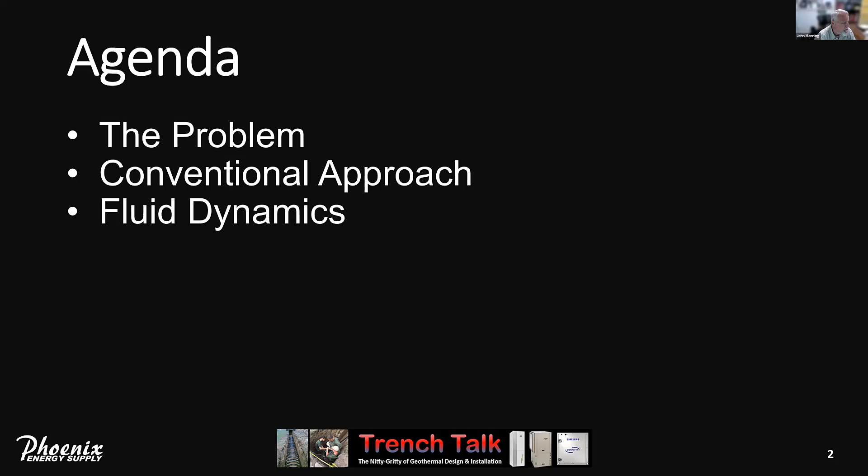So without further ado, that's today's agenda. One, we'll describe the problem, or the opportunity as you might prefer to call it. What would be the conventional approach to solve that problem? A little bit about fluid dynamics and understanding the system behavior, talk about energy, the GX features, our exclusive design support in designing such systems. And of course, I want to hear from you—either questions or comments are much appreciated.

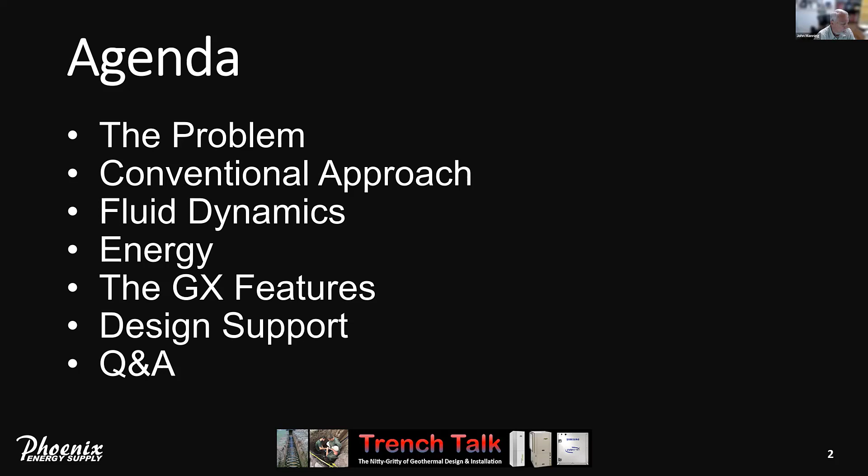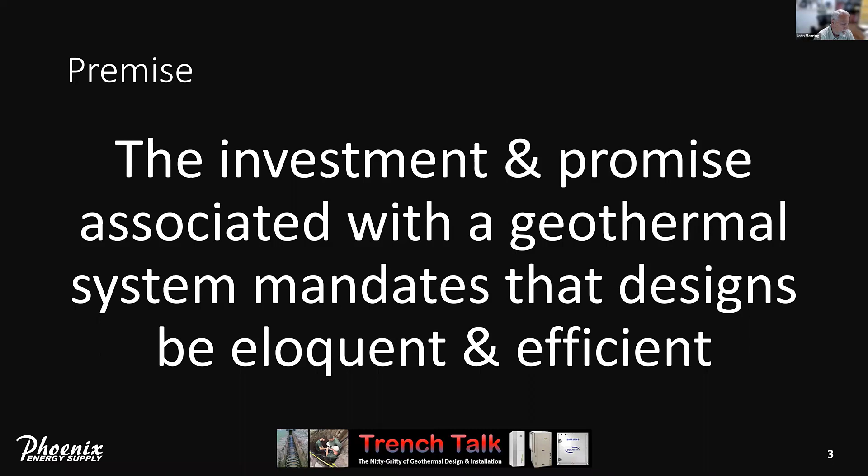So the premise that the GX Flow Center was built upon was that the investment and promise associated with a geothermal system mandates that designs be elegant and efficient. People are spending tens of thousands, hundreds of thousands of dollars to get a geothermal system—it's not just to make them warm or cold, it is to do so with the highest efficiency. That word is synonymous with geothermal. So the problem is, whenever you have a system of say 3 or more heat pumps, how do you go about developing a pumping strategy that really reflects the type of efficiency and elegance that we want to see in a geothermal system.

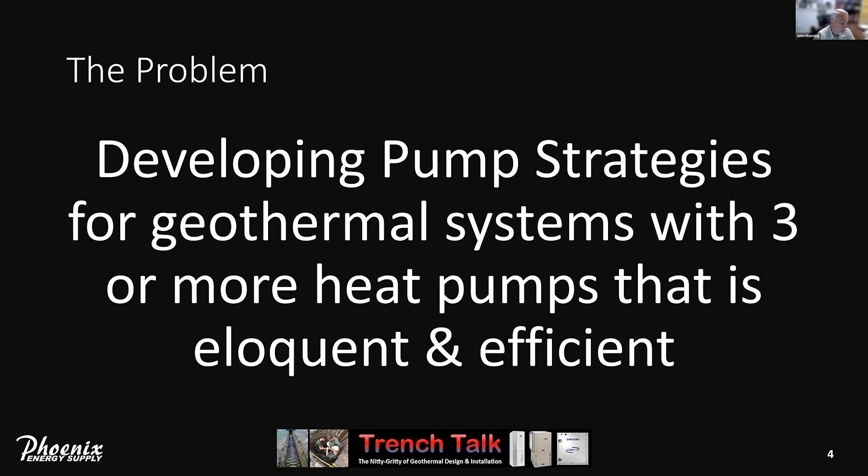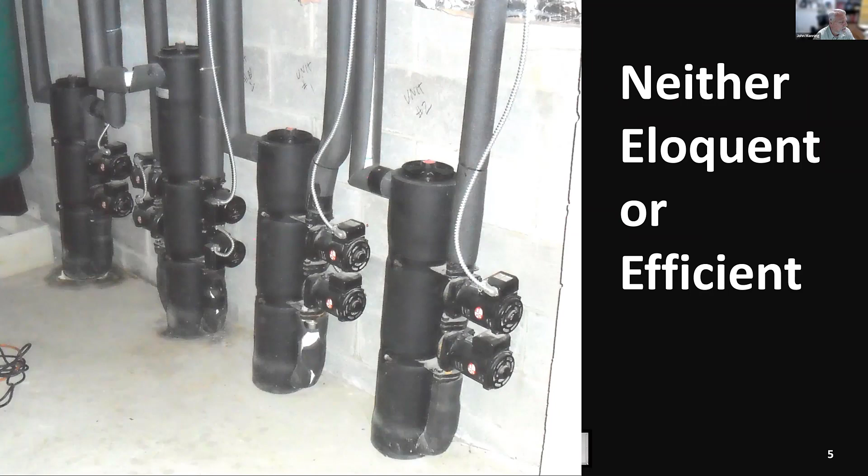So here's a picture of a job I visited down in New Jersey. Now, I sold those flow centers, so I was real happy when I got the order, but it is neither elegant nor efficient. The total of 7 heat pumps being served—you can't even see all the flow centers on this job. This one right here is actually a 2-circuit flow center, but each one of them feeds a single heat pump. The dual circuit feeds 2. And there are more flow centers out of the field of view of the camera. So a total of 7 heat pumps, each having 2 pumps to serve it.

These being non-pressurized flow centers requires that each one have its own dedicated loop field. You cannot put more than 1 non-pressurized flow center on a single loop field. In other words, you can't have multiple non-pressurized flow centers on a system. And when you do that, you lose the benefit of having a consolidated single loop. There's nothing better than 1 out of 7 heat pumps operating on a much larger loop field under those part load conditions.

Although multiple pressurized pump packs can be piped in parallel and used on a consolidated loop field, the energy implications are the same.

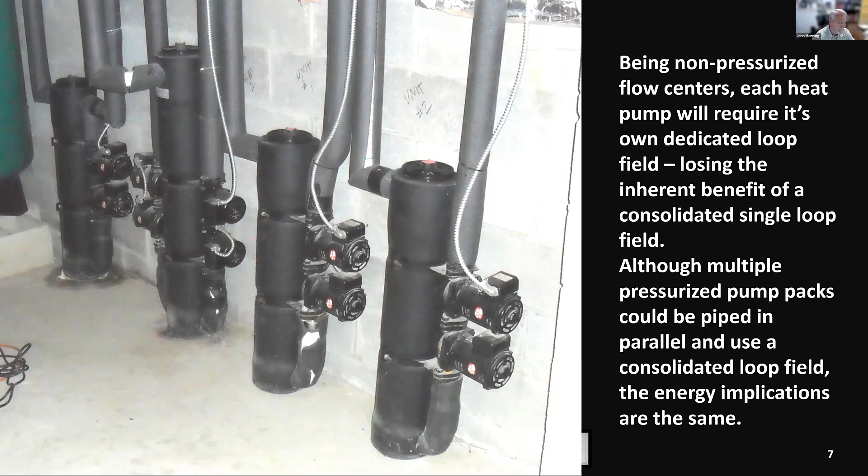So let's do some math. We've got 7 heat pumps, we've got 2 circulators on each heat pump, each circulator is going to draw about 200 watts. If each heat pump operates roughly 2,500 hours a year, you've got the 200 watts times 2 pumps times 7 heat pumps times 2,500 hours. That's 7,000 kilowatt hours, or at 15 cents a kilowatt hour, results in over $1,000 a year to operate those 14 circulators.

So if Charlie would be so kind to pop up a poll about pump energy—how much pump energy do you think we can save if we had a more elegant solution? I see the results, it's pretty evenly split from 40 to 80%. Give you a minute or two to get some more responses. I appreciate you taking the time to answer our quick poll.

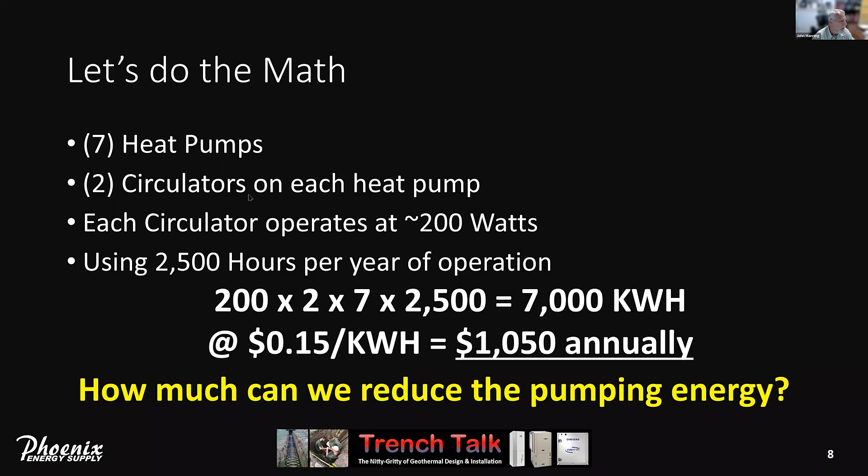Let's go to the next screen. Fluid dynamics—understanding this is the key to really understanding the energy associated with pumping.

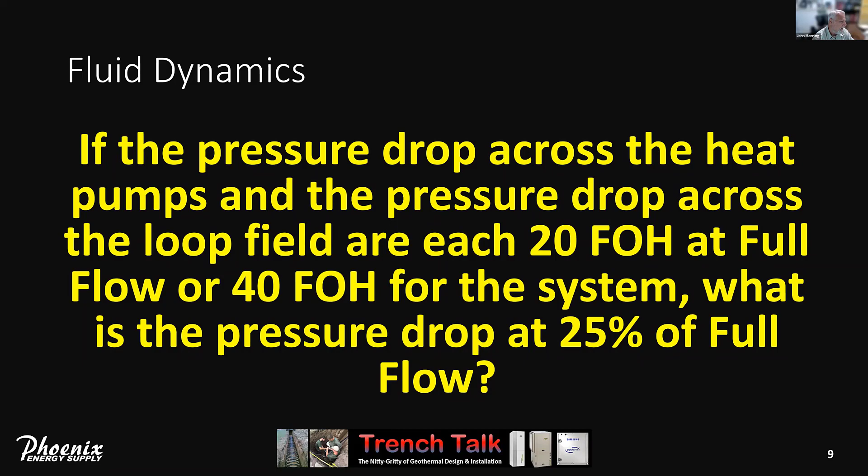So the question is, and this is another poll I want you to just react to: if the pressure drop across the heat pumps and the pressure drop across the loop field are each 20 feet of head at full flow, or 40 feet of head for the total system pressure drop, what is the pressure drop at 25% of full flow? For example, if we had 40 gallons a minute and the total pressure drop was 40 feet of head, and then we were to pump only 10 gallons a minute through that same system, what would the pressure drop be? Got one response so far. I'm going to let you guys ponder this because it provides insight into the dynamics in a system. You really got to be comfortable with this understanding, not necessarily to do the math, but to have a gut feel about what's happening in a system.

You've got two parts to the system: you've got the loop field and you've got the heat pumps. Combining the loop field pressure drop with the heat pump pressure drop results in the system pressure drop. And as I said, the total system under full flow is 40 feet of head.

In the loop field, we don't care what the flow rate is. The pressure drop follows a typical parabolic curve. So if we cut the flow rate in the loop field in half, the loop field pressure drop will go down by a factor of 4 — that's 1/2 squared, or 1/4. So at 20 GPM, the loop field pressure drop will drop all the way down to 5 feet of head.

At 25% of full flow, we square 1/4, or 0.25, and that results in a very low pressure drop — basically 1.25 feet of head across the loop field when we cut its flow rate down by a factor of 4. So from 40 GPM down to 10 GPM, the pressure drop drops considerably, whatever the math works out to be.

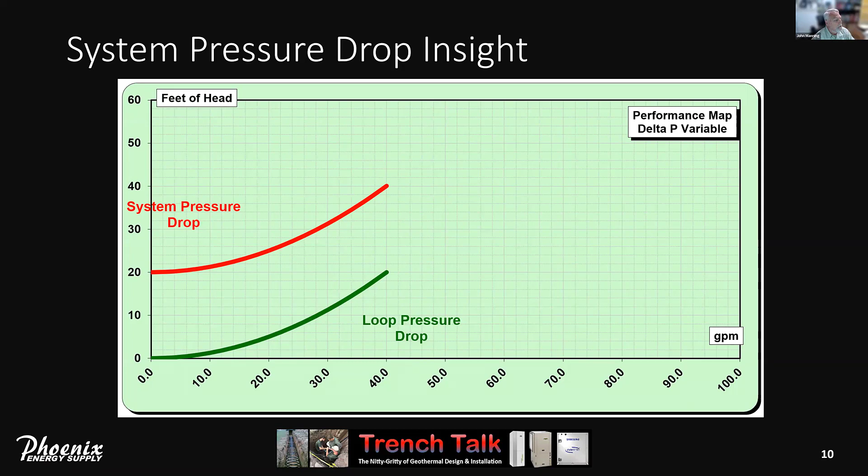So to me, this is a vital understanding for picking the right pumping strategy. Now, wouldn't it be wonderful if we had a pump that was smart enough to know this and adapt accordingly — that when the system's operating at half flow, it doesn't have to create as much head, and if it's operating at very low flow, it doesn't have to create even that much head. So it's a smart pump.

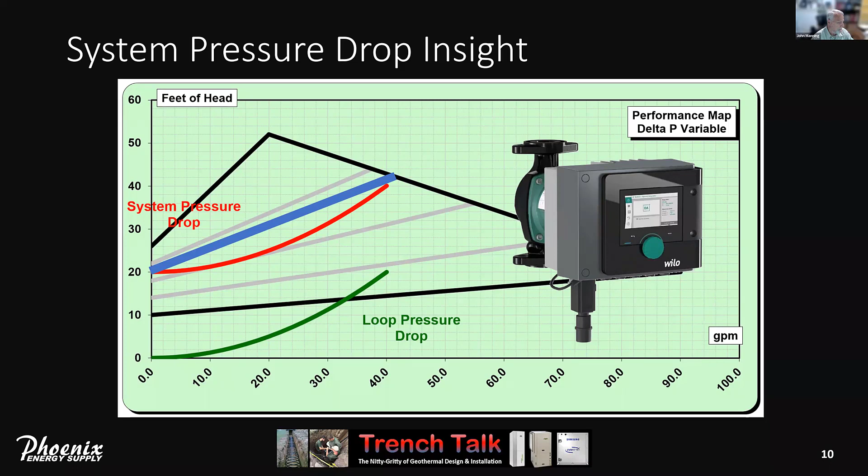And those energy implications — here's the actual WILO curve, and these angled lines illustrate the variable delta P curves I just talked about. In some applications you may have to set it up to be a constant delta P, but for right now, ideally you want variable delta P. And here's that control line we'd like to use in this application.

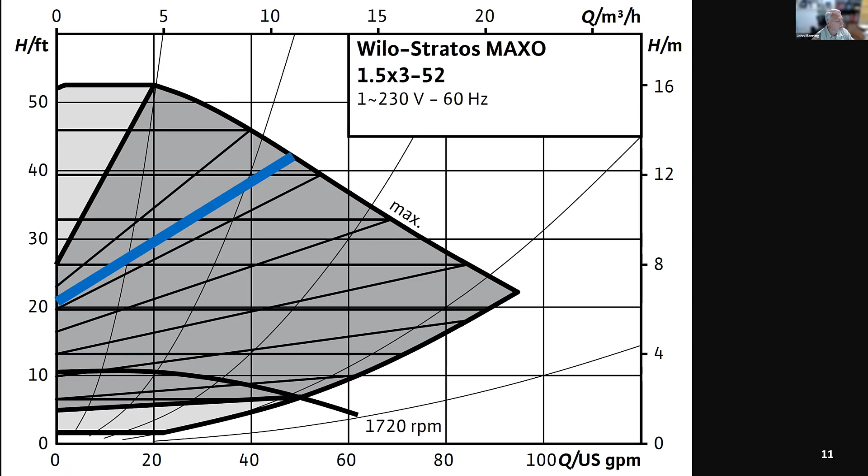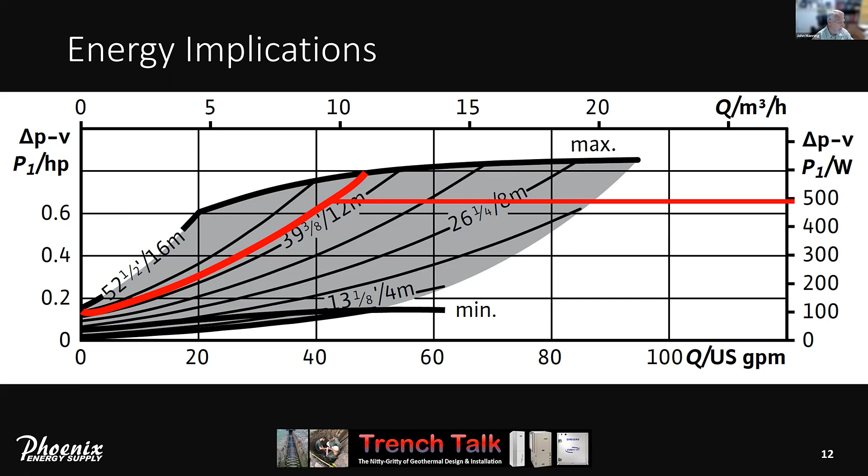At 42 GPM, we can see where those lines cross and go over to the right, illustrating roughly 490 watts. So at full flow, we're looking at 42 GPM, 40 feet of head, for 490 watts. We cut our flow down to roughly 1/4, and now we're looking at roughly 150 watts for 10 GPM, and roughly 21.125 feet of head.

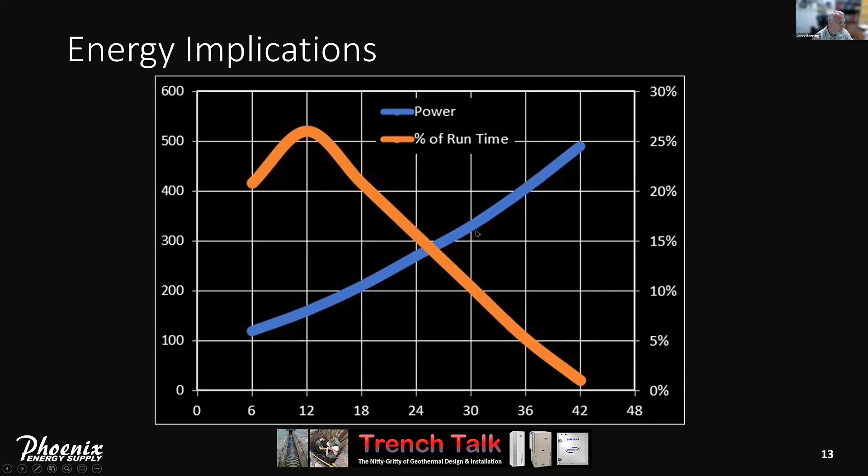Almost every application will have a curve similar to this. Very seldom will every heat pump be running simultaneously. The bulk of the time, you're going to have 1 to 3 or 4 out of 7 operating simultaneously. Understanding this distribution of runtime combined with the power curve, we can put all this data into a table.

We can look at 6 GPM, it's 120 watts. At 24 GPM, 270 watts. We take the percent of runtime, and this is based on 5,000 hours a year of operation for the flow center, which is a lot more than a single heat pump. Each heat pump will operate roughly 2,000 to 2,500 hours a year, but due to their overlap and simultaneous operation, the flow center would have to operate typically about 5,000 hours a year.

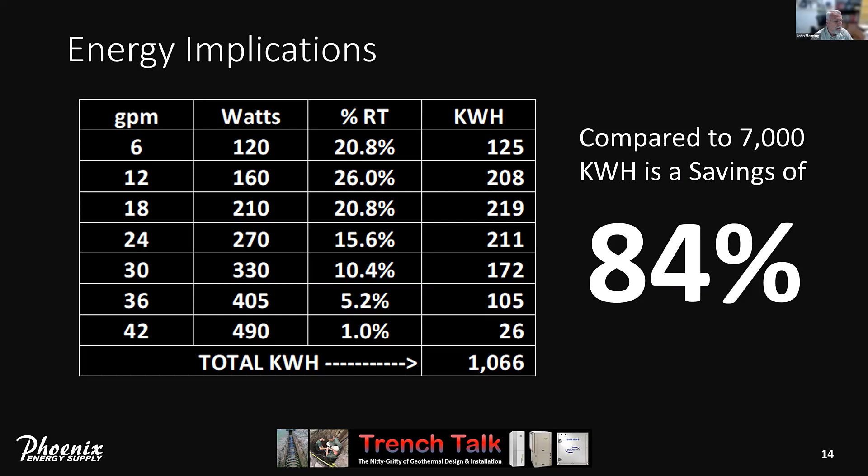We do the math, we accumulate those kilowatt hours, and in this case, our energy for this system is a little over 1,000 kilowatt hours a year, compared to 7,000 kilowatt hours. That's a savings of 84%. So it's significant, dramatic, cutting operating costs from $1,000 a year down to $150 a year or thereabouts.

So let me introduce you to the GX Flow Center. We've got 5 configurations. The basic is just a single pump and one big circuit through the heat pump, through the loop field and back.

Then we have the dual. We have 2 pumps in parallel. You can size them to give you full redundancy or partial redundancy, whatever you choose. I'm a big fan of partial redundancy. That allows you to keep the size of the pumps perhaps one size smaller and save some money. So it's a judgment call whether your client wants 100% redundancy where the system can operate on one pump only and meet full flow requirements, or partial redundancy where a single pump might be able to handle 60 to 70% of full flow on one pump.

Then we also have primary, secondary. We have 2 pumps in 2 separate circuits. The primary, which is the loop field, would have 1 pump. The secondary, which are the heat pumps, has 1 pump. You may have to use primary secondary when the pressure drops of either side, or the total pressure drop of both, exceeds the capability of our pumps. So if you break it up into primary secondary, you have a dedicated pump for each half of the system, which you may need to do. I don't think it's preferable over a basic or a dual, but quite often you get stuck needing that kind of pumping approach.

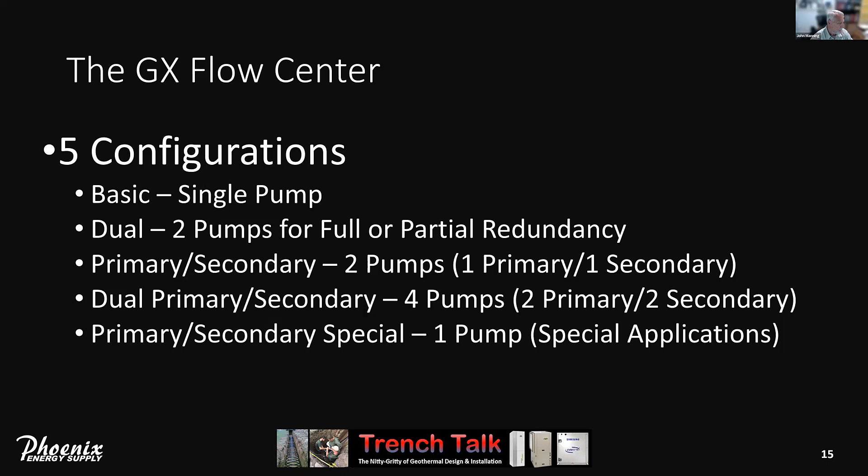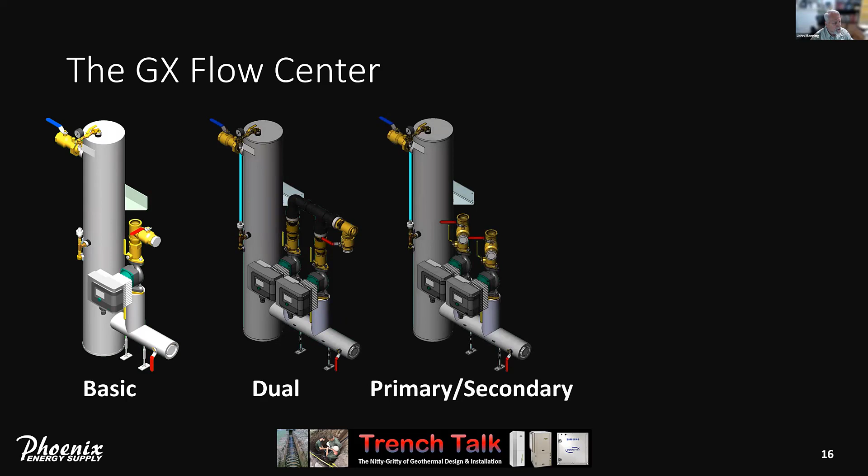So what do they look like? Here's the basic, the dual, the primary secondary, and the dual primary secondary, which we fondly refer to as the Spaceship.

It is quite an interesting looking product. Actually, some of our earlier models of the Spaceship, one of them is installed down in Tennessee at Al Gore's house. And Anna and I had the luxury of going down there and doing a service call on our flow center.

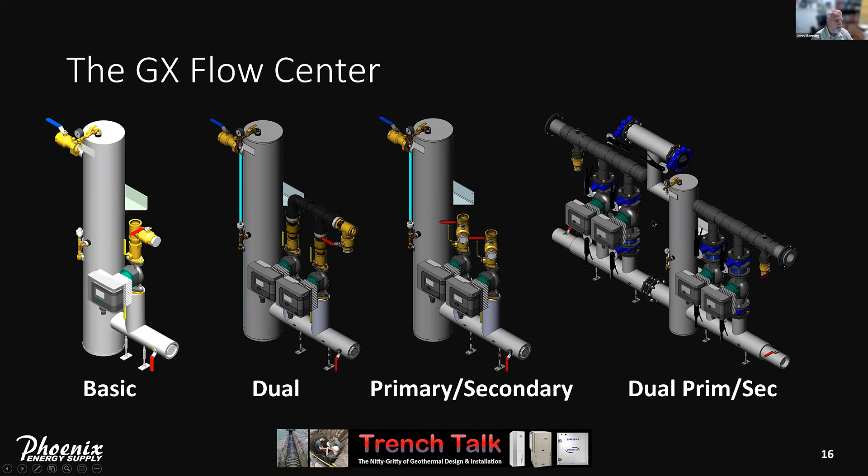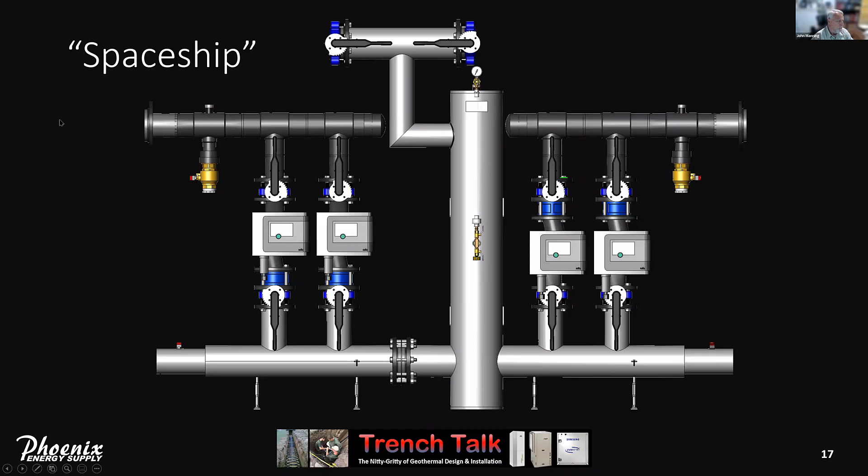So the Spaceship, I want to talk a minute about this design. Dual pump, primary, secondary. We're going to come in from our loop field on the left. These 2 pumps will pump down into a lower manifold, which will go through our canister. It's open to the canister, but directly opposite it is what's feeding our secondary pumps. So our secondary pumps pump up and out this manifold to feed the heat pumps in the system.

We come back from the heat pumps and connect to this butterfly valve, which has a straight through leg that goes out to the loop field. But there's a branch circuit off that T that goes right back into our canister, allowing the canister to be a hydraulic separator so we can operate the primary and the secondary at 2 different flow rates. The secondary side will be dictated by how many heat pumps actually have their 2-way valves open and what kind of flow rate is being dictated by the heat pumps.

And these WILO pumps will adapt. You'll configure these in a constant delta P mode because you always want X amount of head available to assure proper flow through each heat pump, no matter how many are operating. So you configure these in a constant delta P, and its flow rate will be dictated by the heat pumps.

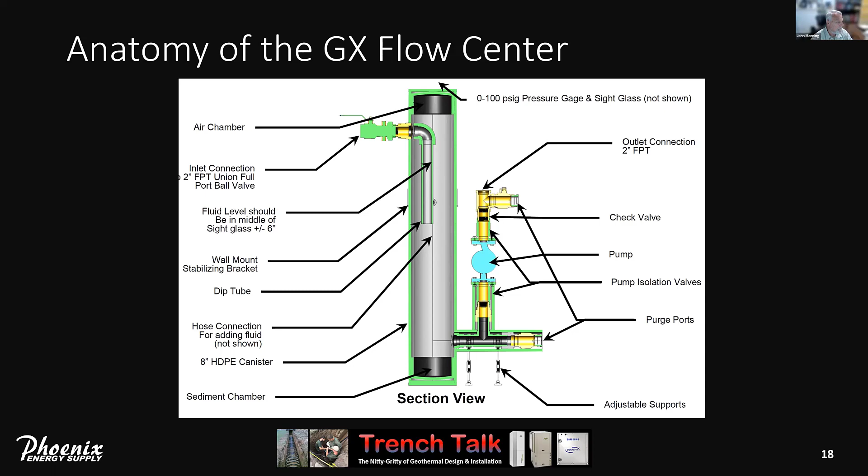For those who like the magic decoder ring to understand our part numbering system, this illustrates that.

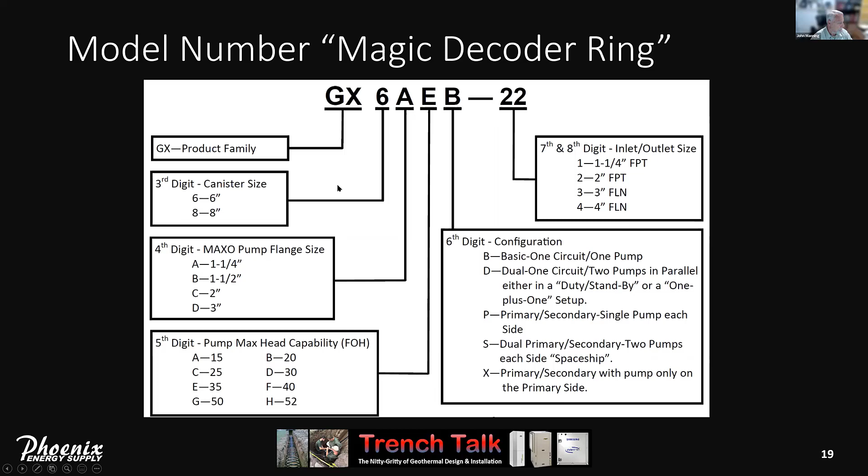Design support: we've put a lot of effort over the years to develop the ability to make selections to meet your needs. Here's an example of a particular project, but I want to walk you through the type of data we put into this, so when you have a project we can help you with, this is the type of data we need.

We'll start with the system characteristics. We like to put in the nominal tonnage and the desired flow rate per ton, which gives us an idea of the flow rate we're looking for.

What type of antifreeze, what level of freeze protection, how many heat pumps, how many distribution manifolds. We can come out of our flow center and go into up to 5 different distribution manifolds, and we have to model each one of those.

We want to designate the configuration of the flow center, and what type of piping you're using indoors. I'm obviously a big fan of polyethylene, but you could use PVC or copper or other material. Each one has its own unique pressure drop characteristics, so we like to capture that.

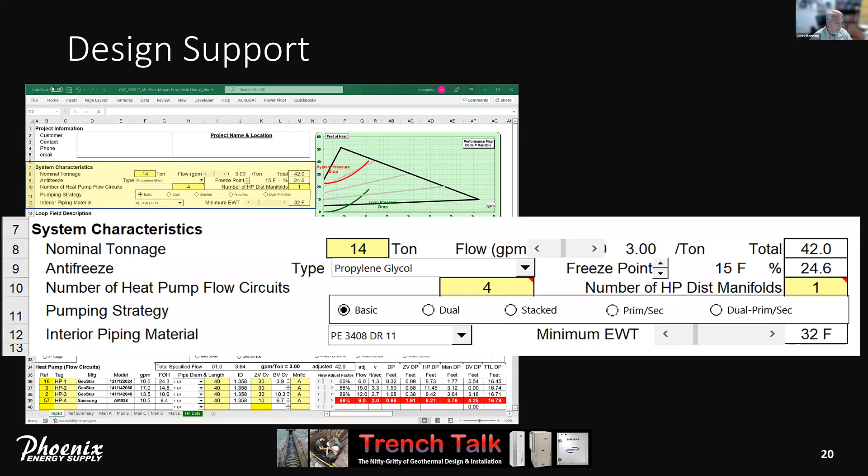The next area we're going to look at is the loop field. In the loop field, we have to define the number of groups, the loops per group, and then it calculates the total number of loops.

The length of piping: a vertical loop that's 400 feet deep has 800 feet of piping. If it's a horizontal loop with only 600-foot circuits, then you'd put 600 feet here. What diameter pipe is in each loop circuit, and what's the DR of that pipe?

What type of manifold? Is it a buried reverse return or a short manifold interior valve manifold? In this case, it is reverse return, but it's a very short one, only 5 feet long with 1 foot between taps.

The supply and return pipe going out to each of the 2 groups - in this case, we have 100 feet of 2-inch pipe. Again, a DR number. The main pipe, once you bring that fluid flow into the building, you combine it into common pipe.

In this case, we're going to have 2 circuits coming into a 2-circuit manifold, and that manifold may feed 20 feet of pipe to get to our flow center. So we have to capture that: 20 feet of 2-inch diameter DR11 pipe.

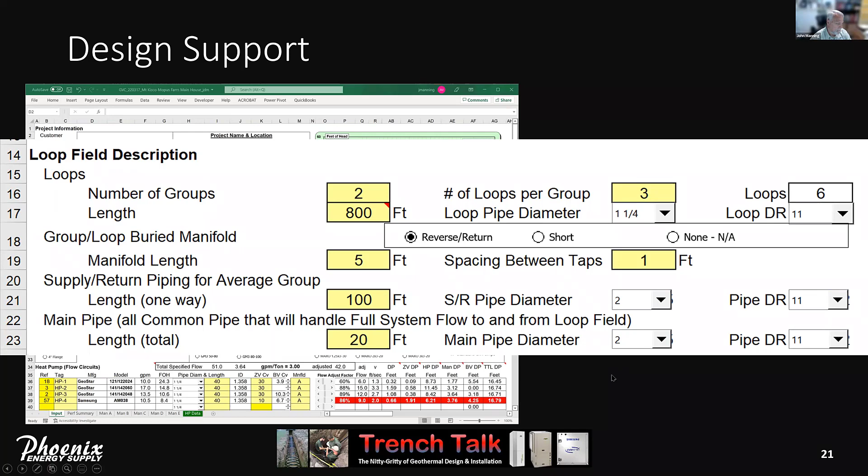The next area we're going to look at are the heat pumps themselves.

We have a database of heat pumps which you can very easily identify by a reference number. All you have to do is put in a reference number and put in a tag. If it's on your drawings, we'll use that tag, otherwise we'll make up a tag and put something there. Then the database populates all these fields.

The manufacturer, the model number, the reference flow rate, and corresponding pressure drop. For example, this is a 2-ton heat pump that the manufacturer chose to rate at 10 gallons a minute. I always like to use the highest flow rate they list as a reference - it gives me a little more accuracy. So at 10 GPM, it has 24.3 feet of head.

I then have to decide what size pipe I'm going to feed that heat pump with, how long is it, what is a zone valve CV that would be appropriate for that heat pump, and which manifold is providing the distribution to those heat pumps?

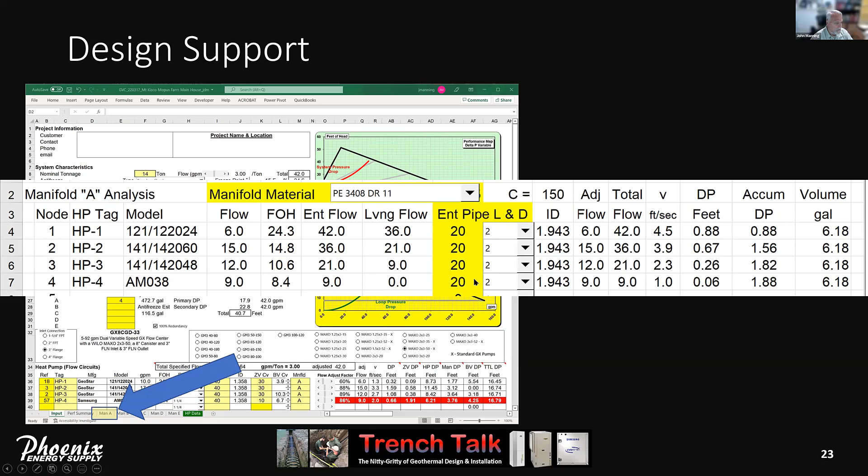But we have to model this. On your drawings, if you have a plan view and we can identify how long each section of this distribution manifold is, that is very helpful. Otherwise, you're just going to have to tell us the length of pipe between each of the heat pumps.

And then we pick a pump. The MAXOs are the only ones we're going to use on the GX, and those with the Dash X are the ones we've standardized on as part of our standard offering. They're typically the higher head capability pumps. The Dash 50 is 50 feet of head, it's a 2-inch pump. We also offer a 35-foot head in a 2-inch.

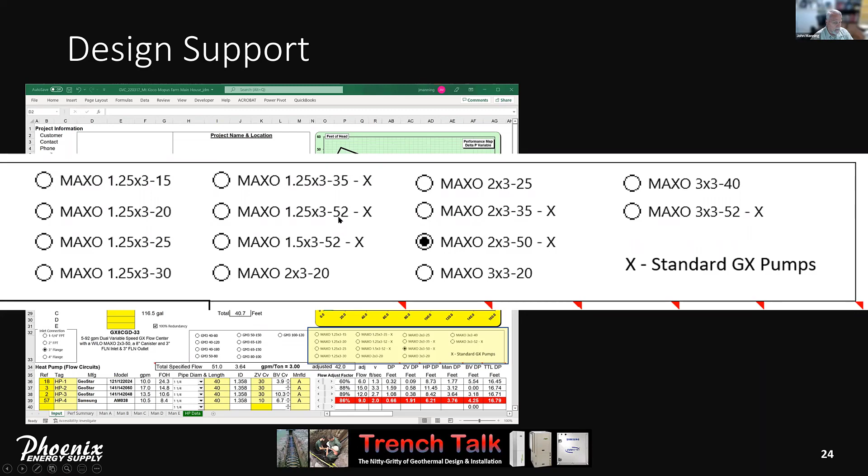We offer the 1.5-inch that can produce 52 feet of head. The 1.25-inch pumps, we have a choice between 35 and 52 feet. So we will pick one to make this curve fit inside the operating envelope of that particular pump.

So the loop field would be 17.9 feet of head at 42 GPM. The heat pump side would be 22.8 feet at 42, a total system of 40.7 feet of head. We also give you an estimated system volume and the amount of antifreeze required to reach the specified concentration.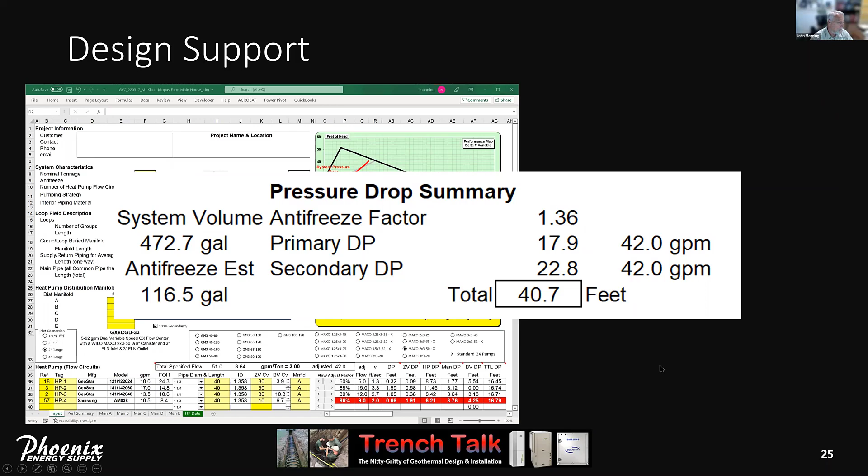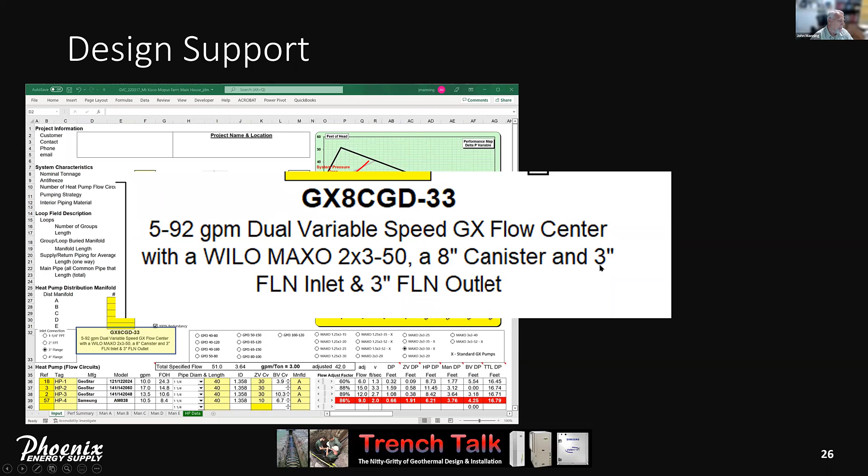And finally, it automatically gives us the model number of the GX Flow Center and the description. So you can see in this particular case, it's a dual with 2-inch pumps that each could provide 50 feet of head, 8-inch canister, 3-inch flange inlet, 3-inch flange outlet.

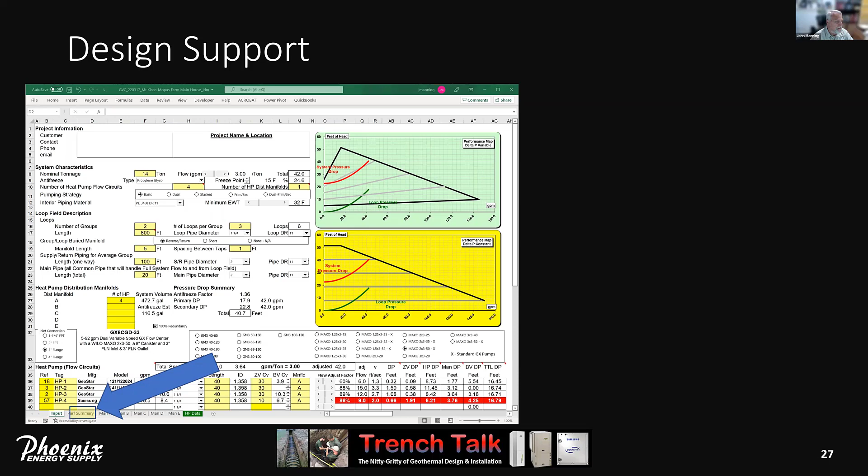And then we have another tab, the performance summary. This is part of the output that we will send to you. It lists the heat pumps. It also lists the closed loop AHRI rating for both heating and cooling.

Lists the GPM that we're going to operate at. We specify a particular two-way valve that corresponds to the CV that we used in our calculations, and gives you the connection size of the valve. We also specify the balance valve that we would like to use. These are FDI valves, one of the better valves in terms of having a low pressure drop.

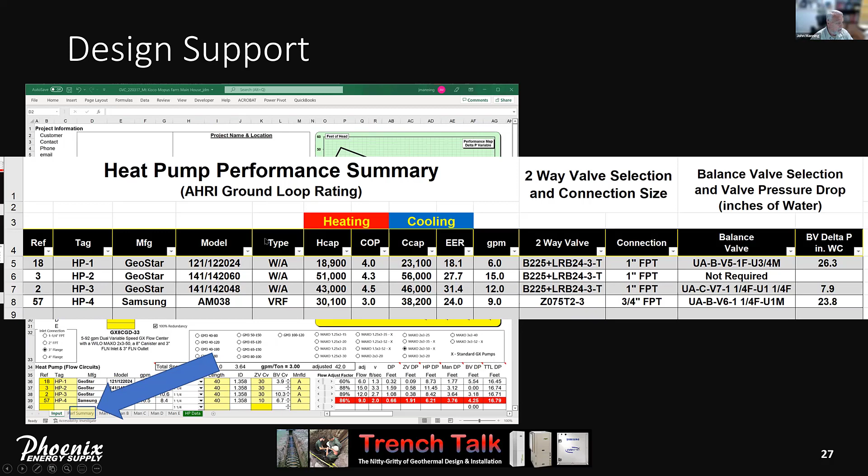We also provide the value, if you take a pressure drop across the valve itself in inches of water column, this is the type of reading you would like to get that corresponds to this flow rate. And obviously we don't need a balance valve on that one heat pump we talked about. So this kind of feedback is what we will give you to help you set up your system.

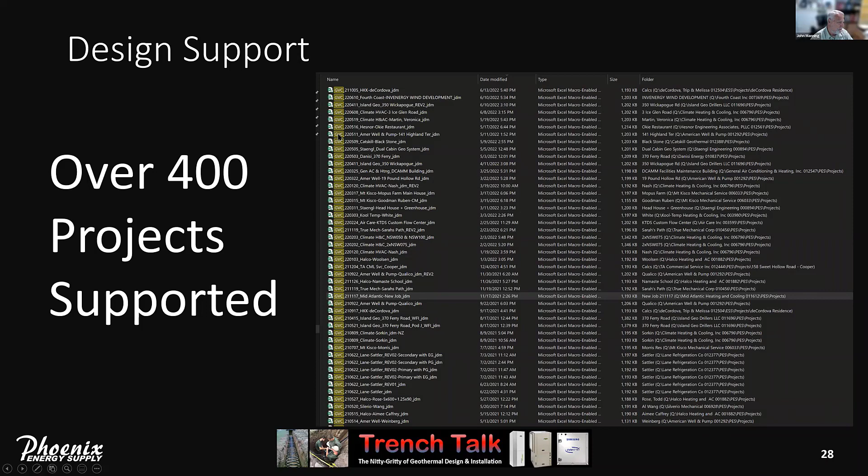We've supported over 400 projects. I did a search today in our folder system for files that start GVC, and there's over 400 of them so far.

Time for questions and answers, hopefully answers. So far, no questions, John. I don't see any questions so far. Come on, did I put you all to sleep? Okay, seeing no questions, I'm going to let you all go home early. I appreciate your time today.